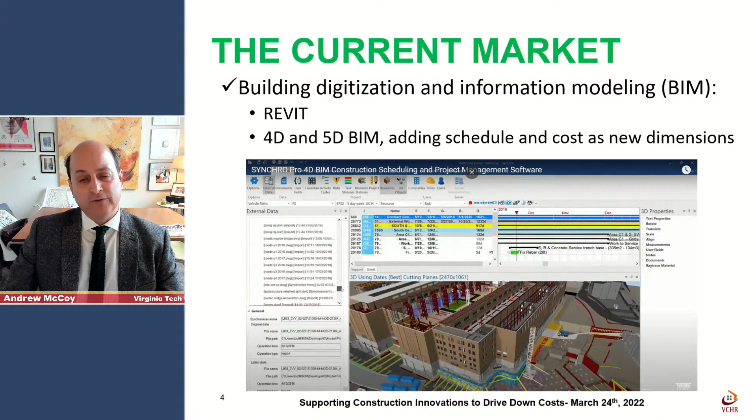But also I wanted to point out as a baseline that everything I'm going to tell you about, all the technologies, a lot of what makes them impactful and possible really is building digitization and information modeling. In the construction industry, we typically use a platform called Revit. But increasingly what you're seeing is the ability to have more dimensions than just the 3 dimensions of the modeling. So you have 4 dimensions and 5 dimensions, you might have cost and schedule now added, and we're going into other dimensions as well. I wanted to mention that as a basis for a lot of what I'm going to talk about today, and maybe as the panel will talk about too.

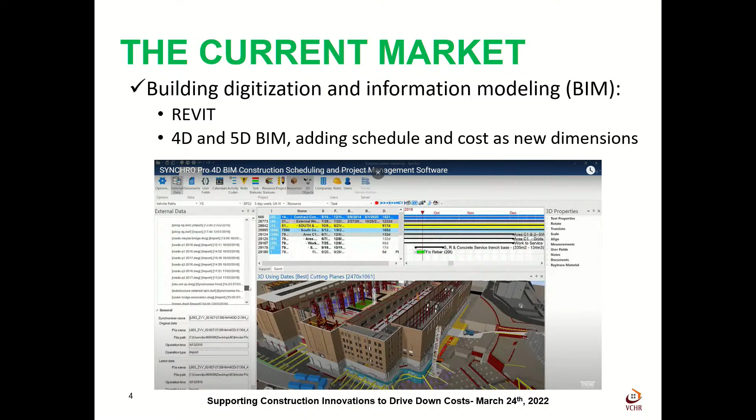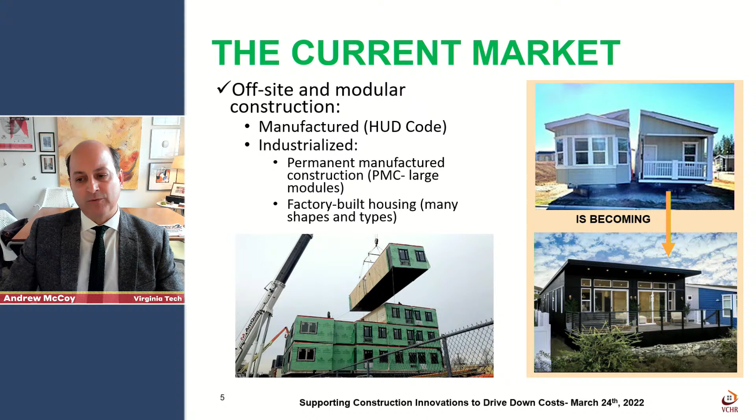In terms of the current market, what we might have considered manufactured HUD code building before is really becoming much more industrialized, and it has been for quite a while, but we're seeing much more permanent manufactured construction where modules will come fully suited. A little bit later, Mark's going to talk to you more about this and get into the details and definitions. But we're seeing much more of our housing that can be produced in a factory setting at many different levels of completeness, with different trades all wrapped into one, and it's ready to go when it hits the site. So we're seeing a lot of off-site and modular construction trends that are just continuing to grow in terms of the options that are out there.

We can panelize many different parts of the construction process long before it gets out onto the site, and have it ready. To the right is an image of structural insulated panel systems, a highly insulated panelized system that comes onto the site ready to go and fits into place nicely, making for very tight construction with a high thermal envelope. We have all kinds of different versions of panelization, and these are all part of the industrialized housing process.

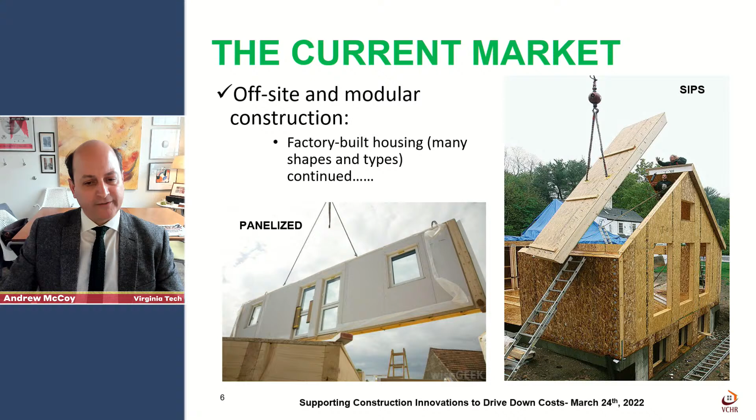I wanted to mention some other parts of the industrializing of the construction process. We have, for example, prefabricated elevator cores that can be lifted onto sites to save time and construction costs, often because they're built off site. You have entire parts of buildings, and this has been happening for quite a while, that can become modular and just fit into a larger construction process, like the bottom right you see there with precast elements of a building.

And then in the upper right, we're seeing the actual process on site more and more - this is a ducting contractor, a mechanical contractor who's prefabricating all the ducting. They've gone into the building, done a complete scan, and created a model of the building. They know exactly what this ducting should look like, they're printing it out, and then having it delivered to the site and installed. It reduces time, it reduces costs, and they can do a lot of the work off-site.

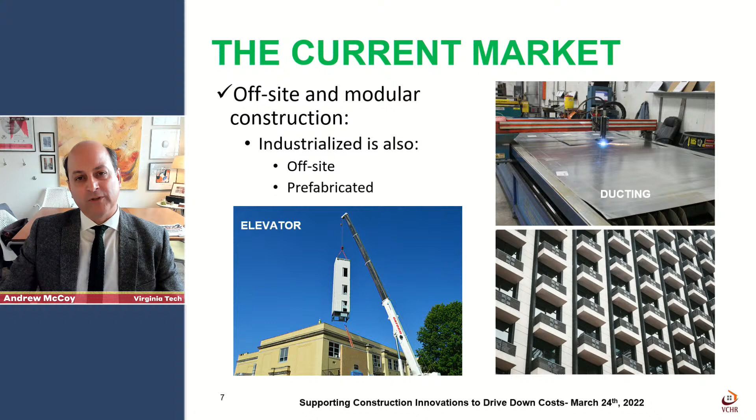One of the other things I want to touch on in the current market is we're seeing a lot of geospatial technologies where we're able to identify and understand what's happening not just on the construction site and what we're going to put above the ground, but also what happens below the ground. Increasingly, especially in urban settings, this is becoming more and more congested. So we're really able to understand, design out, and then overlay - that's what you see in the bottom left of your screen. We can overlay all this information onto the site, and it becomes much more of a digital representation of what is there, what's beneath the site, what's going to be on top of the site, all these different sides to it.

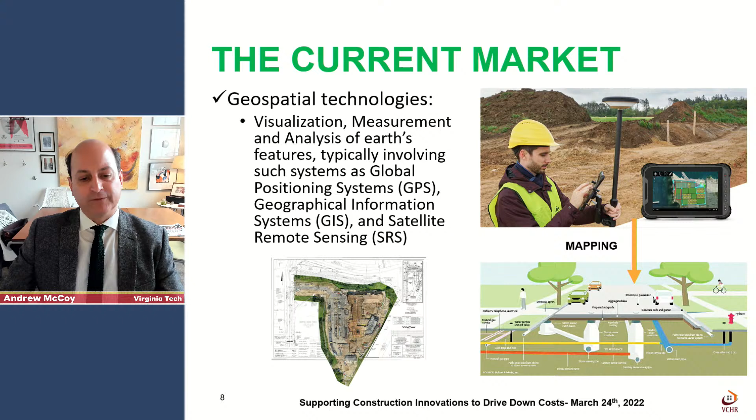There's a lot of information out there on it right now. What you'll see is that the wood construction technology, which basically helps us avoid some of the cost of concrete and steel construction, is going up 20, 30 stories now in some cities. So it's a very exciting future of where things are going. It's a little bit on the horizon though - a lot of the details are of how the engineering and how the wood structure comes together. That's where it takes a lot of expertise and people are trying to figure it out.

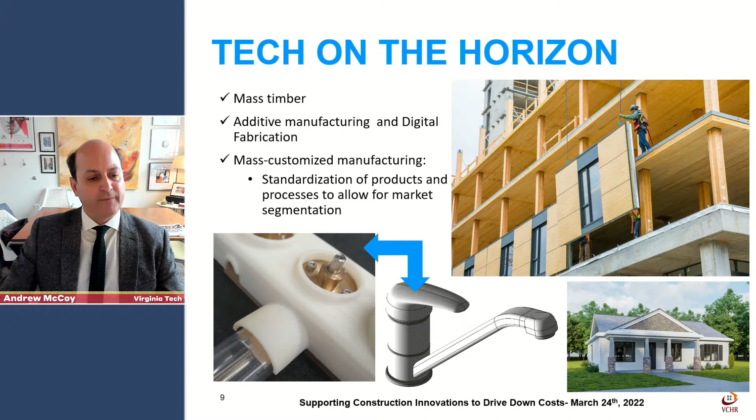And then on the left, I'm showing you the way that we can do mass customization now too. We're starting to see parts of the house itself that can be customized, but they can be mass produced through digital and additive manufacturing. I'll give you an example: each one of these houses printed by Alquist on the bottom right comes with a 3D polymer or plastics-based printer that allows you, if you break a handle or a switch plate on the wall, to just plug in the USB and it'll print a new one for you. So we're seeing a lot of that in housing.

Also, we're seeing a lot of robotics, right? So you're seeing that, especially as labor continues to be stressed, robotics are starting to be able to lay brick, lay concrete block, and help workers in terms of stress and strain that they might have on the job site.

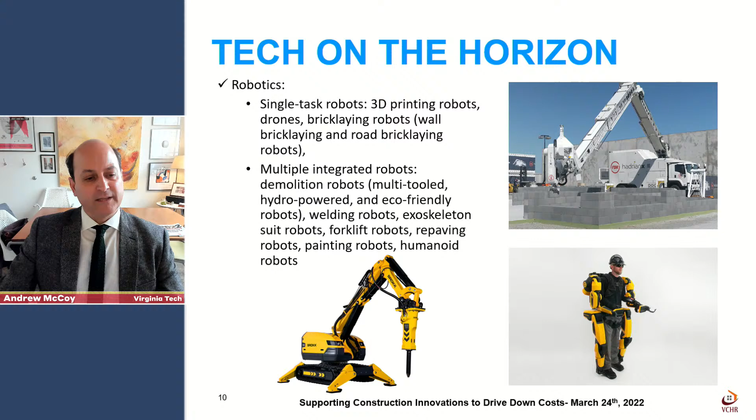That extends their life cycle and ability to work later, especially if we have a lot of retirements and people on the site are needed more and more, and we don't have as many people entering into the trades. This is very helpful. And then you have the ability, on the bottom left of the screen there, for robots to go into much more unsafe settings and be able to do work that in the past was more difficult to do, and we can save money by using robots there as well.

On the horizon, I think what we're going to see is a lot more remote construction. I think the pandemic really brought this about as well, but those technologies through augmented reality and virtual reality let you really see what's going to happen on the site, work through the digital environment, work with positioning of equipment, stockpiling, site settings, and really keep track of surveying what's happening on the site at all times through drones. That's increasingly happening as well.

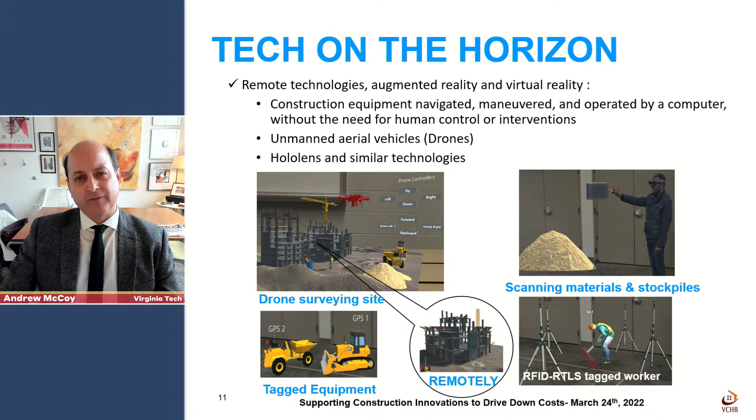You can also figure out what's happening with workers and how they're moving across the site, especially for unsafe conditions, things like that. And that's through the RFID tagging process.

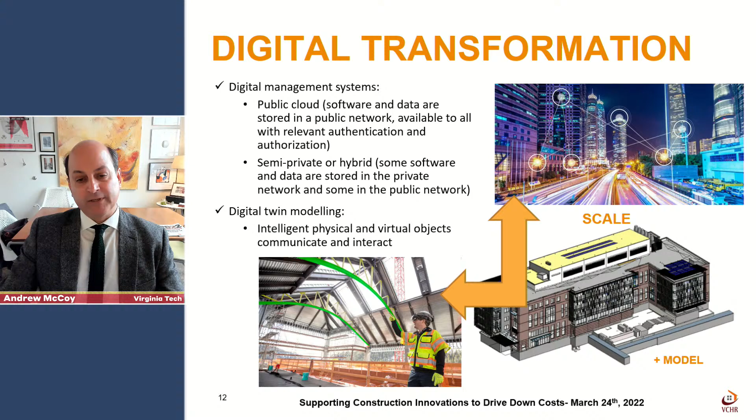But in that process, we're also able to start collecting more and more information about buildings, how they're functioning, how they're operating. So the life cycle of a building, where a lot of the cost is longer term, we can start to understand how to bring down those costs.

And what you see here is for one building that we recently studied. You can look at a lot of the different operations in the building, and with the amount of data and the machine learning that we're seeing in the construction space, you're starting to be able to predict when you're going to have certain failures of equipment, things like that, because you can see patterns over time.

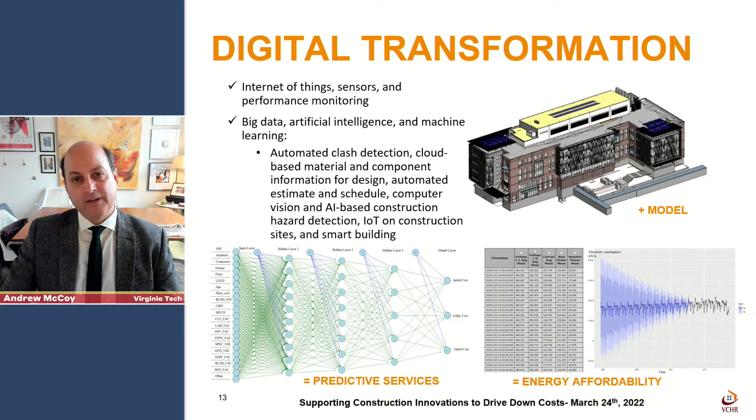And you can also look at items like energy usage and affordability and start to work with spaces, understand what makes for good spaces for working or for learning or healthy spaces, and also be able to help drive different conditions that would mean more affordable operation, which means affordability that's hopefully passed on to the resident or the person who's in that building and owning that building.

And then I think finally, down, we're seeing this really on the horizon. It's some of our PhD work that we're seeing more and more, this idea of computer vision. So if we can have image-based 3D models that identify, especially in terms of automated cars and other vehicles, unmanned vehicles, can we translate that now to the construction site where we can understand safety, we can understand quality, we can translate that to quick scans.

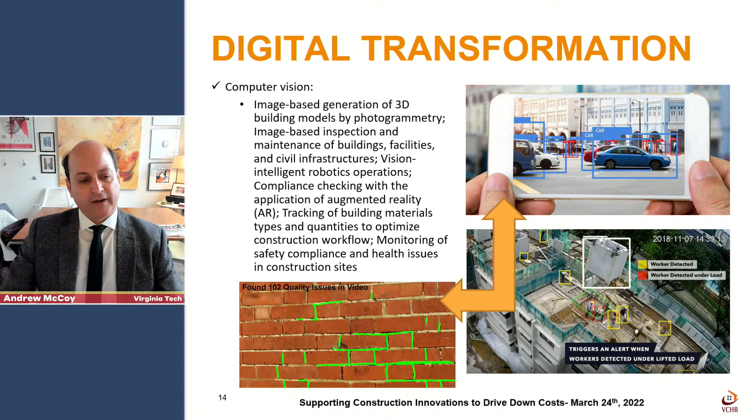So just real quickly, if we looked at kind of innovation in the regulatory landscape, what conditions are favoring innovation right now? Material, labor, and supply chain costs and delays are very prevalent. You hear about it a lot, and it's a problem. Housing availability and cost is something that's really driving the need for innovation in this space. Inflation, of course, is a concern right now. And then really, because of those three, we're seeing that the market is very open to innovation like never before, especially in housing, where you have a younger generation who really needs housing, needs starter level housing, and they increasingly are interested in technology.

What kind of progress have we seen? Well, building codes have been written at the national level for modular construction. We're seeing changes in building codes that look at manufactured housing as well. It's great, but especially in the manufactured housing realm, we're seeing great finance options that are starting to open up. Builders are actively looking for ways to reduce costs right now.

And they always are, but I think right now it's especially acute. The market is accepting of different types of housing, both builders and customers. We do still have NIMBY. We have all levels from zoning to public sentiment.

Innovation is risky and expensive, and we need people willing to experiment. Innovation needs investment, public and private, and that's tricky. There's a lot of interest in the construction technology market, or con-tech, in terms of investment. And so what that often brings is exaggerated claims of success. So we have to be careful in this space and make sure that if an innovation doesn't work, we don't wipe out all the hope for other innovations as well.

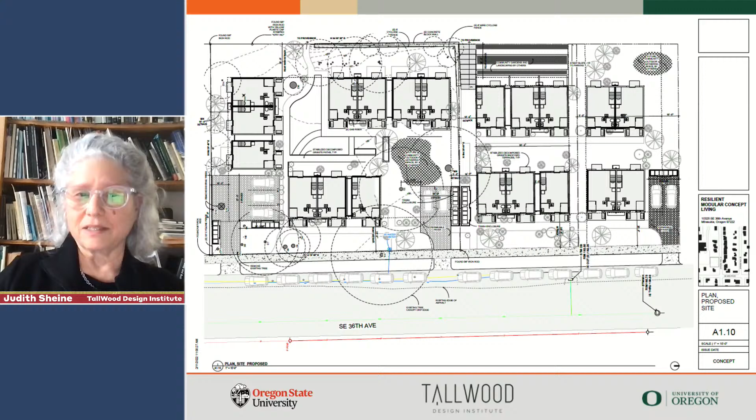So we're doing a pilot project of 34 units in Milwaukie. You can see a site plan here for three of them - the two sites on the right are actually owned by Providence, which they've given to this development along with some development funds, because they're very interested in seeing this succeed.

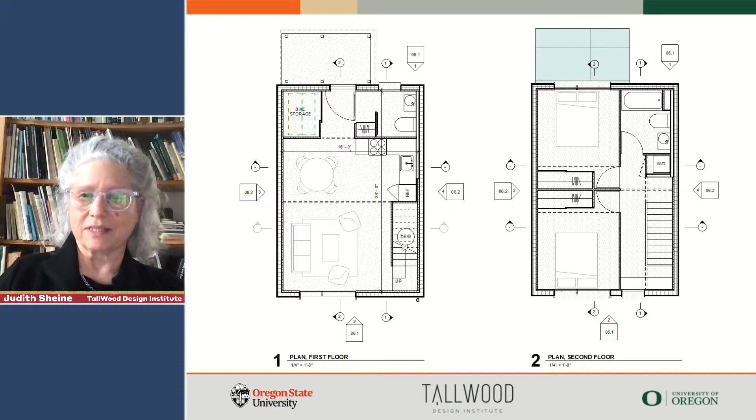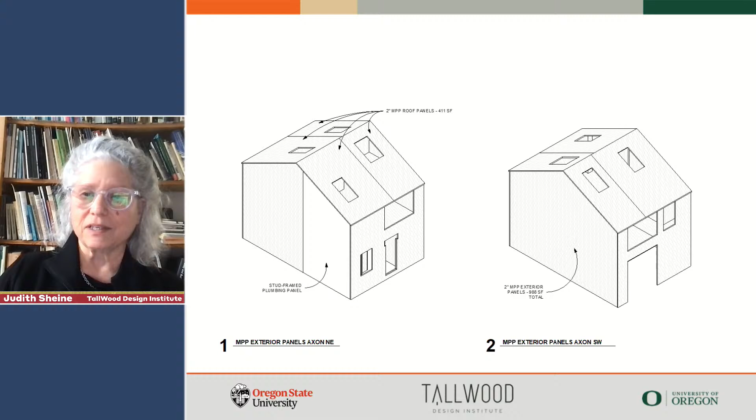We've been working largely on making this affordable, creating a very tight and efficient site plan for 2-bedroom units which are repeatable - singles and duplexes. We've been working on reducing the amount of panel we use, taking the height down of the gable, and looking carefully at how much volume of wood we're using, both outside and inside, taking advantage of prefabrication and factory techniques.

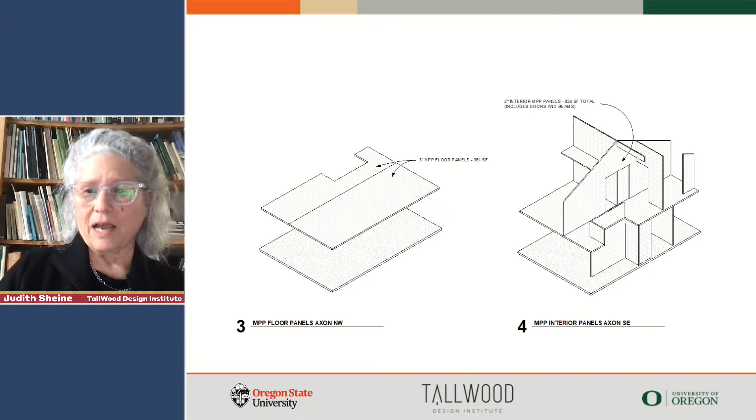We're working on a second project looking at retrofits, using essentially the same technology. There's an enormous amount of housing stock built in the 60s and 70s on the West Coast - light wood frame, 2- and 3-story multifamily housing - desperately in need of energy retrofits. Originally there was an RFP from the Department of Energy for CLT wall retrofits for energy efficiency, but we decided to also make it about seismic retrofit, which is desperately needed on the West Coast.

We're working again with thin MPP panels, and with one of our partners, Andre Barbosa at Oregon State University's College of Engineering, to develop prefabricated panels that can be hoisted up in place and attached to buildings without much disturbance to current residents.

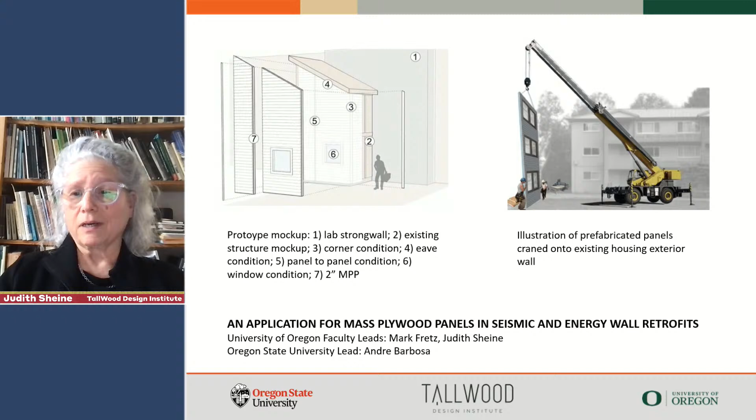These panels will actually be lifted into place on our mock-up next week. We hope in both of these projects to prove affordability, since we know cost is a huge issue, as well as reducing construction time through prefabrication. Thank you.